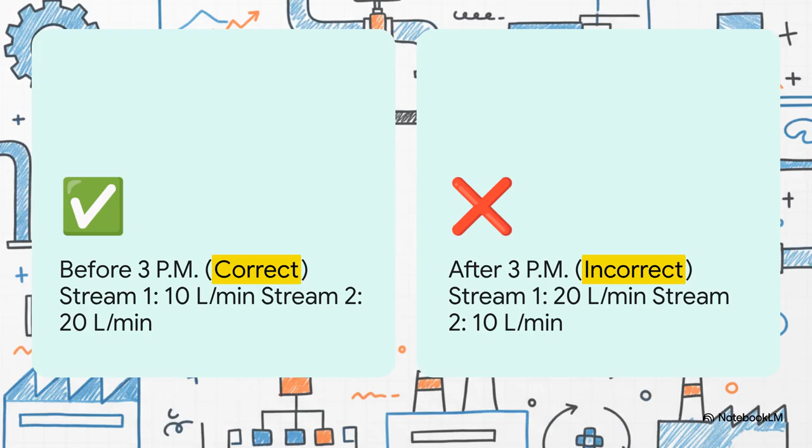Now, on the surface, this mistake looks simple enough. The total flow rate into the system is still 30 liters per minute, right? The operator just swapped the values for stream 1 and stream 2. It seems pretty minor, but trust me, the consequences of this are going to ripple through the entire process.

So, the big question for the engineers is, what happens now? How is this tiny little change going to affect the final product that comes out of the system? To figure that out, they basically have to see the future. And how do they do that? They build a model. This is always the first step in any kind of process investigation. You have to understand exactly how the system behaves when things change.

The whole field we're talking about here is called process dynamics. It's not about the steady, normal, predictable state of the plant. Nope. It's about what happens in those moments after something goes wrong, or any change is made, really. You could call it the science of the in-between.

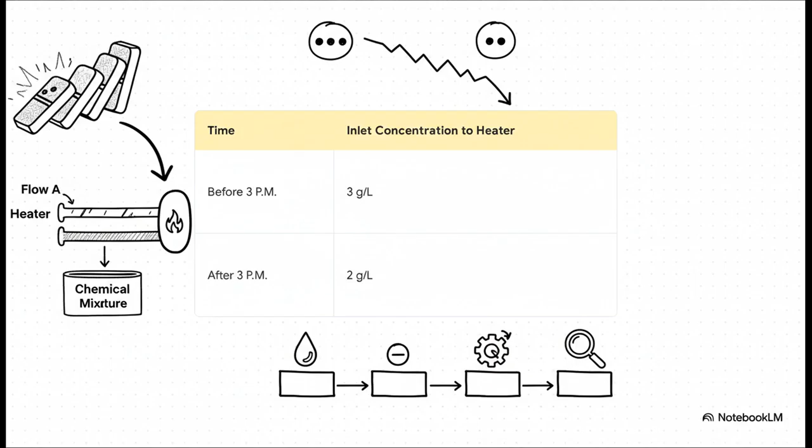Okay, so let's look at the first domino to fall. Because those flow rates got swapped, the concentration of the chemical mixture going into the next stage, which happens to be a heater, immediately drops. It goes from a steady 3 grams per liter all the way down to 2. And this change, right at the inlet, is instantaneous.

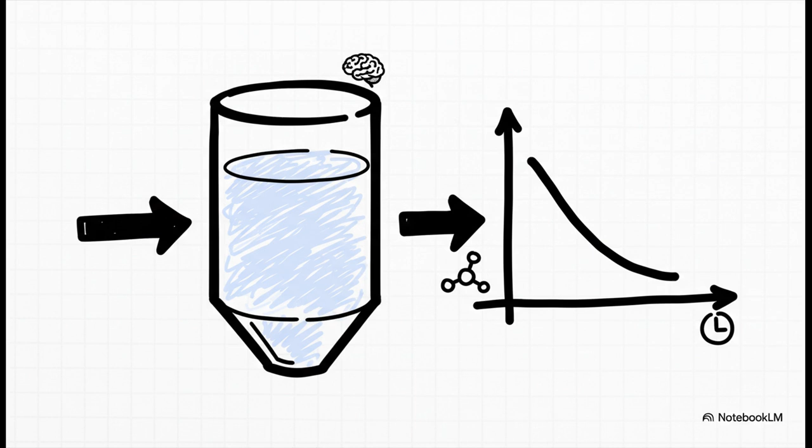But, and this is the crucial part, the concentration at the outlet of the heater doesn't just snap to that new value. The tank has volume, right? It's got a sort of memory of what used to be in it. So what happens is the concentration starts to decrease along this perfect, predictable exponential curve. It's changing, yeah, but it's not chaotic at all.

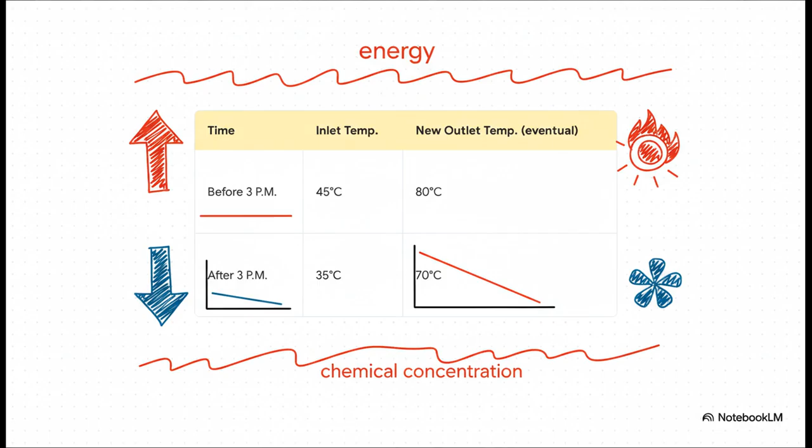And it's not just about the chemical concentration. The same exact thing happens with energy. The operator's mistake also made the inlet temperature drop from 45 down to 35 degrees Celsius. So if the heater just keeps pumping in the same amount of energy, the outlet temperature is also going to start a slow, predictable decline toward a new, lower, steady temperature.

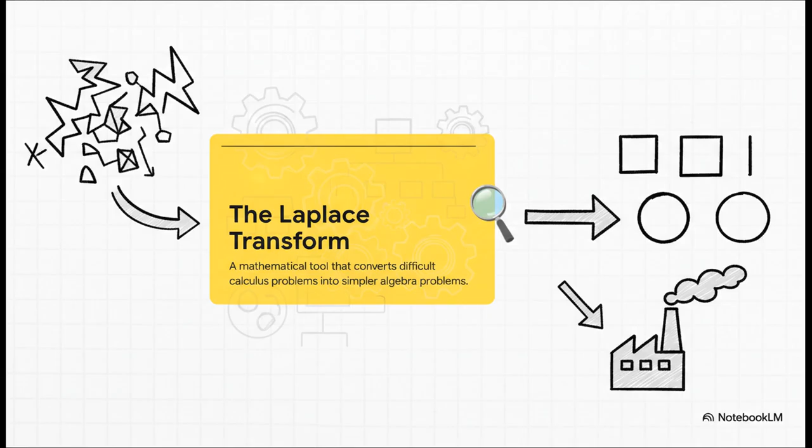But let's be honest, solving differential equations can be a little tricky. So engineers have a secret weapon. It's a very clever mathematical tool that makes the whole thing incredibly elegant and way, way simpler. It's called the Laplace transform, and the genius of it is that it doesn't solve the hard problem directly. What it does instead is it transforms the problem into a totally different mathematical world, a world where the solution is actually easy, and then it just transforms that easy solution back.

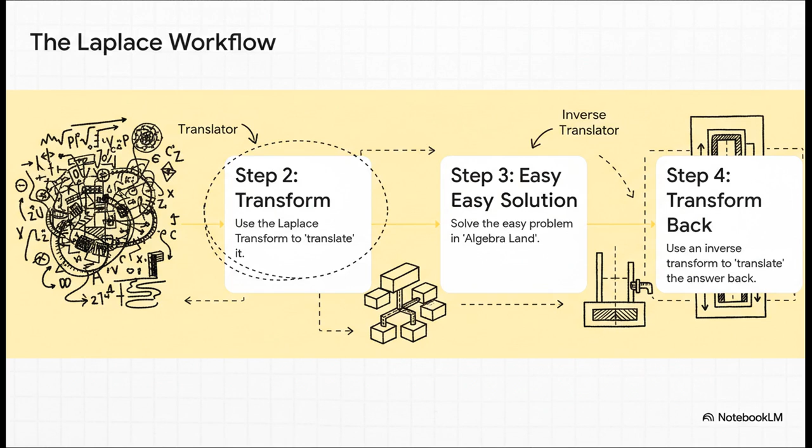Think about it like this. You've got this really difficult text written in a tough language. Let's call it calculus land. So you use a translator, that's our Laplace transform, to convert it into a much simpler language, algebra land. You read it, you understand it, and then you use an inverse translator to bring the meaning back to your original language. It's just a brilliant workaround.

So here's the magic trick. The hardest part of our differential equation, that d/dt term, in algebra land, it just becomes simple multiplication. That's it. It turns calculus into algebra. And once you solve the algebra, you just transform back to get your prediction of how the concentration changes over time.

Okay, so we've seen that engineers can accurately predict how a system is going to fail. They can literally see the future of the product's quality. But prediction is only half the battle. The real goal here is control. I mean, what's the point of knowing disaster is coming if you can't do anything to stop it? How do we take this amazing predictive power and use it to build a system that can fix problems all on its own, maybe even before they become actual problems?

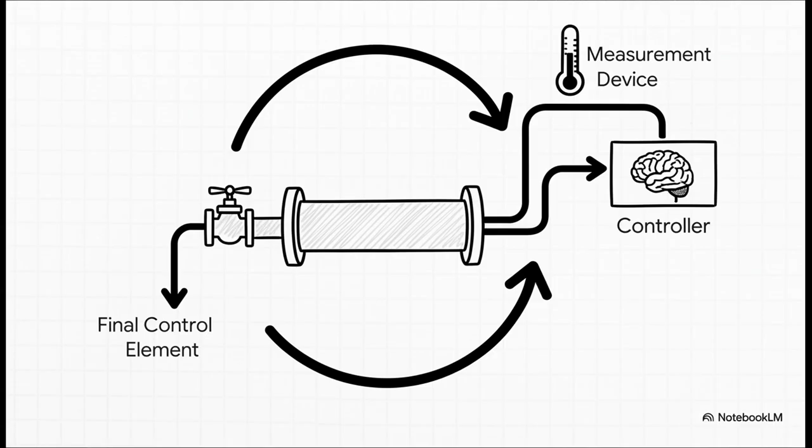The answer is a feedback loop. It's pretty cool how it works. You install a measurement device, like a temperature sensor, that's just constantly watching the process. This information gets fed back to a controller, which is kind of like the brain of the operation. The controller compares the actual temperature to the temperature you want it to be. That's the set point. And if there's a difference, it sends a signal to a final control element, maybe a valve, telling it to make an adjustment.

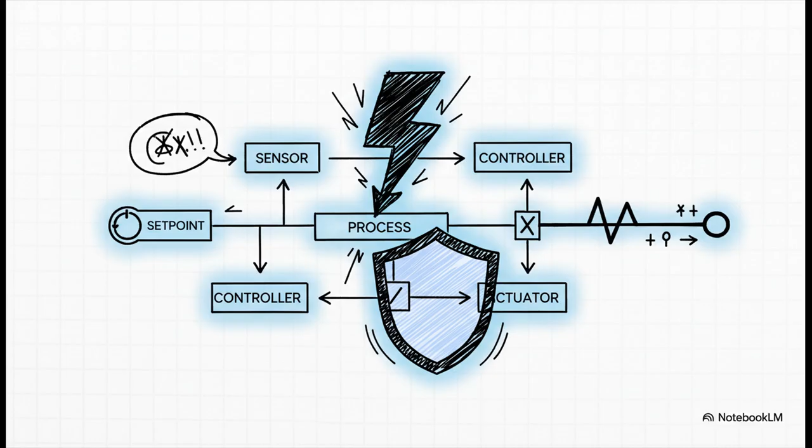The whole point of this loop is to handle disturbances, like our operator's 3 p.m. mistake, automatically. It's constantly measuring, comparing, and correcting, making sure the product stays perfect and the process stays safe, without a human having to watch it every single second.

And this really brings us to our final thought. With this kind of system in place, could a smart controller have noticed that drop in temperature and automatically cranked up the heat, fixing the operator's mistake before the shift supervisor even knew something was wrong? Well, that right there, that's the power and the promise of process control.